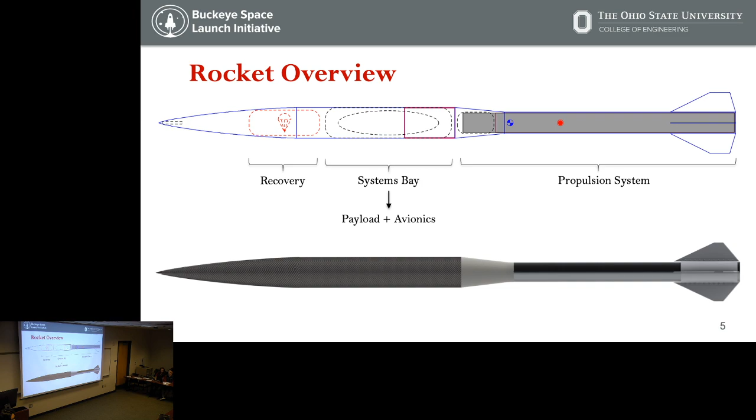You can see from the colors what the parts are made of — we'll have our own created nose cone out of carbon fiber, and a body tube out of carbon fiber. Then a special transition section, made out of fiberglass to ensure radio frequency transparency, since this is also where our telemetry will be housed. That's a very light overview; our leads will go into much greater detail about all of these.

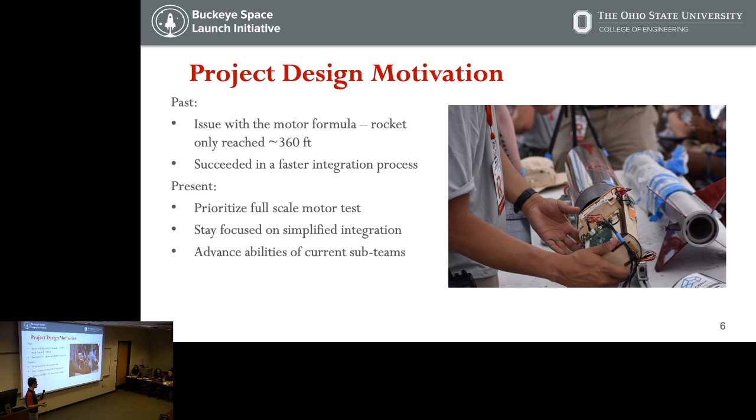Okay. Hi, I'm Carly. I'm the structures team lead.

The purpose of the structures team is to construct the airframe and all the internal components, mostly so that they survive all the stages of flight, but also to optimize the vehicle's performance in flight. We also provide hands-on opportunities for all of our members to construct composite components. And we also build the team's information base and pass on information so that future iterations of the team can use it.

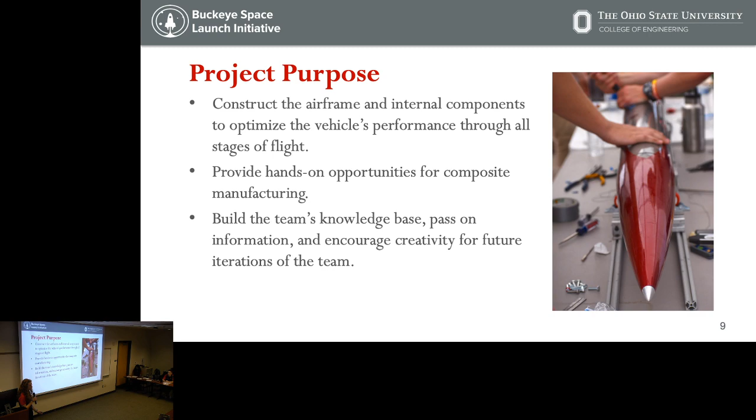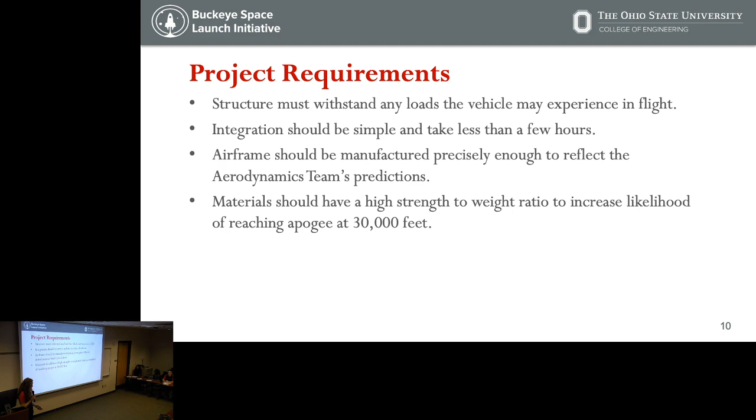The project requirements for the structures team are, firstly, to withstand any loads the vehicle may experience in flight. Integration should remain simple and straightforward and take less than a few hours. We're aiming to launch on the first day again like we did last year. The airframe should be manufactured precisely enough to reflect the aerodynamics team's work predicting how it will perform in flight. And our materials should be light enough so that our vehicle can get to 30,000 feet while still maintaining that strength. On our materials, we did some composite testing at Scott Lab according to ASTM standards.

The pieces varied in number of layers. We did 2, 4, 6, 8, or 10 layers, and they varied in epoxy type, high or low temperature. In some of our layup processes, we use a spray-on adhesive in the layup procedure. We wanted to see if that would negatively affect how the piece performs structurally.

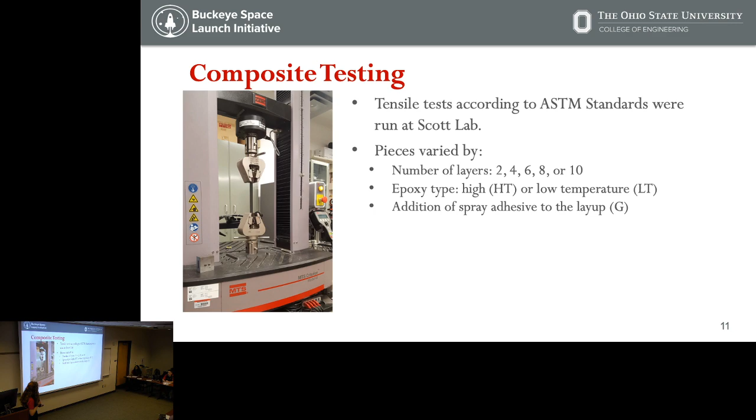The results from this are as shown. The load is on the y-axis, and the bar's height represents how much load the piece can resist before breaking. On the x-axis is the label. HT stands for high temp, LT stands for low temp. The addition of G stands for the addition of the spray glue, and the number represents how many layers the piece has. These are preliminary results, and in the chart is about 25 trials. So it basically just compares the pieces between each other.

What we found was, as you'd expect, the fracture strength increases as you go up in the number of layers in the laminate. But as we did not expect, the low temperature epoxy consistently performed better than the high temperature epoxy. Also, the spray adhesive had no negative effect on the piece's tensile properties.

Further analysis into this data would give the Young's modulus and Poisson's ratio, which could be used in an FEA software along with the aerodynamics data to figure out how each piece would perform under loads.

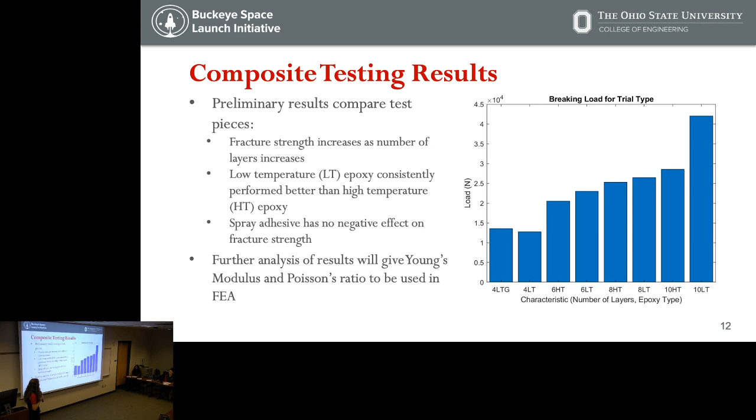So if you were here for the PDR, you saw this image with all of our pieces together. The fins in the fin can are likely going to be purchased again unless we have time to water jet cut them. The motor tube, fins, fin can, and the motor tube mount are all aluminum, and we're also going to make our own motor tube mount. The transition piece, coupler, body tube, and nose cone, like Anu said, are composite.

The coupler, body tube, and nose cone are carbon fiber, and the transition piece is fiberglass, like Anu said. We're also going to use high temperature epoxy in all of our composite pieces, just for heat resistance in case the vehicle experiences any shocks along its flight.

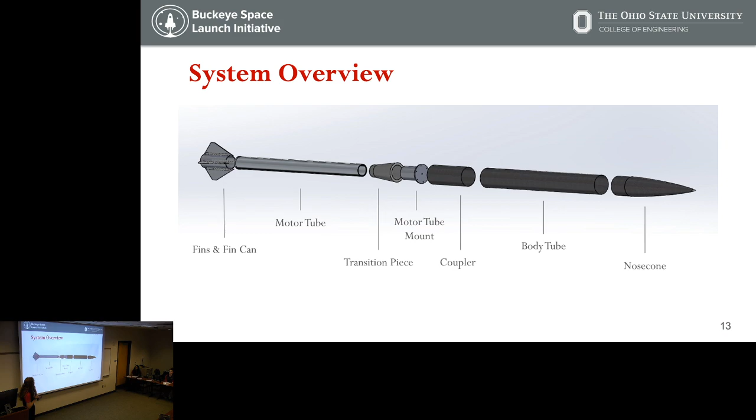I'll do a brief overview of each piece in general. The nose cone is the same as last year. It's a 27.5-inch von Kármán shape with a 6-inch coupler laid up in one piece. The carbon fiber is 6 layers thick and has an aluminum tip at the top.

This year, we're going to add spray adhesive into the manufacturing process. That's so the carbon fiber doesn't pull itself away from the mold, and when we get the piece out, it'll be the same shape as we'd expect. This worked in test trial, so that's exciting. Also, the spray glue didn't have any negative effect on the tensile properties of the piece.

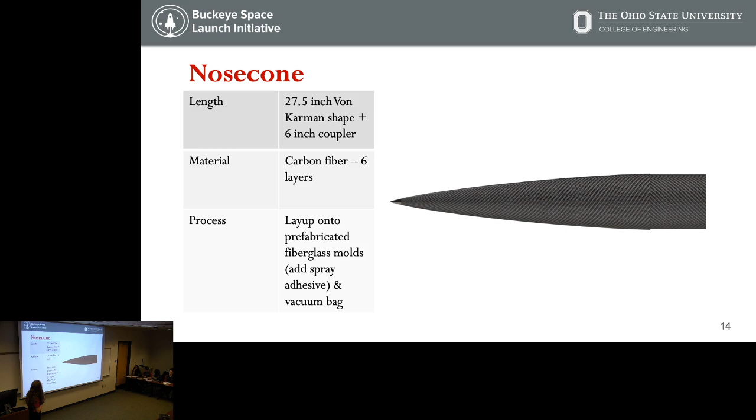The body tube would slide onto the coupler of the nose cone and meet the nose cone at the shoulder. The length is 31.5 inches. This will also be 6 layers of carbon fiber laid up on an aluminum mandrel. We'll roll on a perforated shrink tape to squeeze out any excess epoxy and reduce the weight.

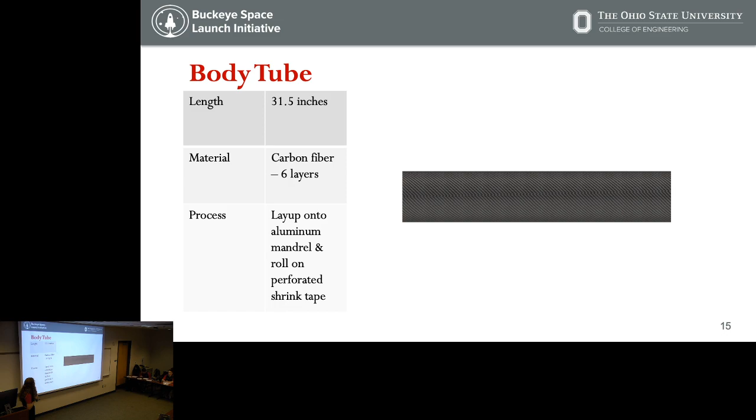For the bulkheads this year, instead of using a wood material as the core, we'll use honeycomb. These will be laid up by first making 2 carbon fiber plates, and after they cure, we'll sandwich honeycomb in between them, along with an adhesive to keep it all together.

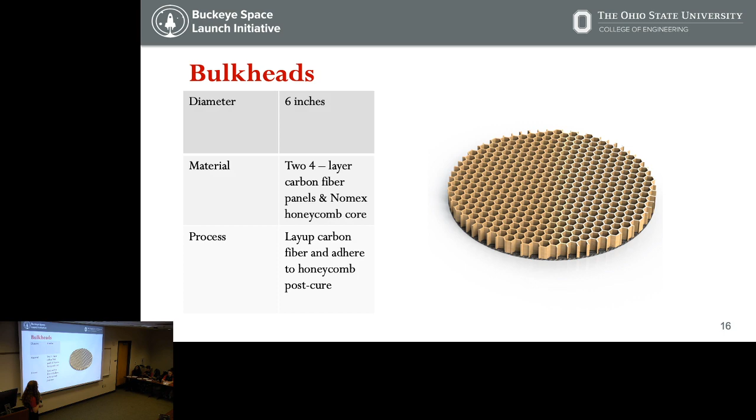This piece is our coupler. As you can see, on one end is a flat part where it's closed off, and the top is free, or hollow - there's no flat plate there. It'll be 10 inches long, and we're planning to overbuild this piece.

That's mainly because where it's placed in the rocket is critical, and it has to adhere the top of the rocket to the bottom of the rocket and experience all the loads and moments in flight. So we can't confidently say it can be 6 layers thick or 8 layers thick. To add in that factor of safety, we're making it 10 layers thick.

It'll be laid up similar to the body tube on an aluminum mandrel and vacuum bagged.

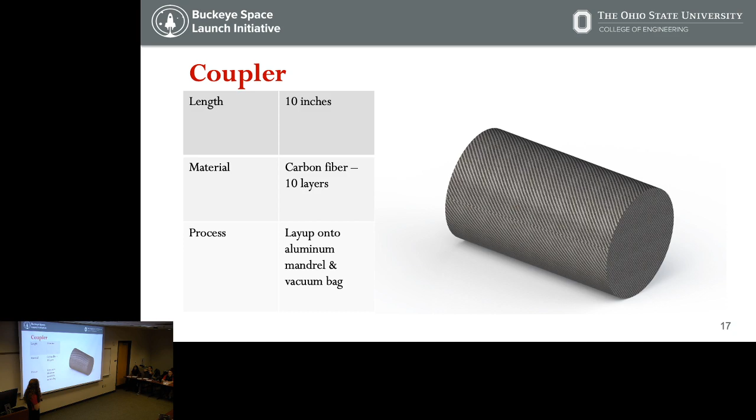The transition section will be 10 inches long. It'll start at the diameter of the body tube and taper to the diameter of the motor tube. It'll be fiberglass, like Anu said, and it'll be 7 layers thick.

This piece is different from last year. Last year, this piece was about 12 layers thick because it was load-bearing, but because this year all of the loading goes mostly through the motor tube mount, this can be much thinner than last year, and that's much lighter. So this is 7 layers thick. It'll be laid up the same as the nose cone on prefabricated molds with the spray adhesive and vacuum bagged.

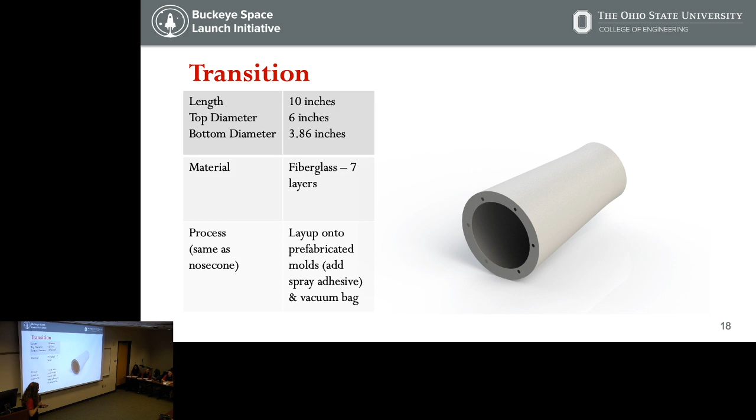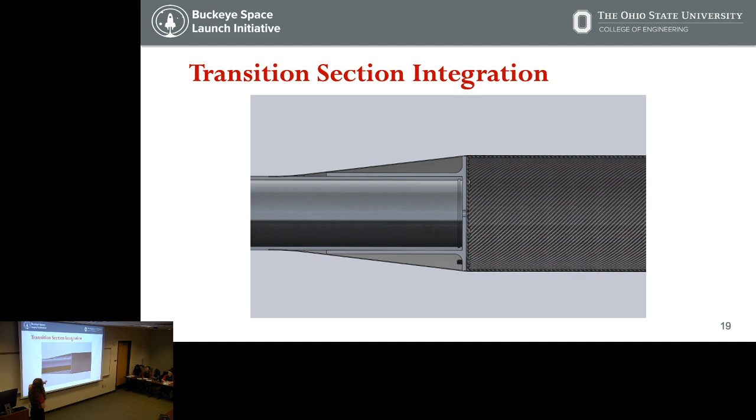Here's showing again what the integration looks like. You can see at the top is the body tube, where the coupler would slide into the body tube, and the flat face would lay on the motor tube mount. That'll bolt into it, with the transition bolting in between the motor tube mount and the coupler. Then the body tube will slide all the way over the coupler and be flush with the transition section.

So this is our risk matrix. I'm calling the composite airframe any composite pieces that are on the outer surface - that'd be the nose cone, body tube, and transition section. Any failure there would result in a catastrophic loss of the vehicle. It's lower likelihood because these are all components that have been flown before and are similar to previous designs, except for the transition section. But if that piece was to fail, it wouldn't cause any catastrophic loss.

Similarly, composite airframe failure due to heating would occur if the vehicle experienced any shocks and the temperature increase caused delaminations in the epoxy or burning. That's a lower likelihood and would cause significant critical impact, but not a catastrophic loss, because it would be a localized failure rather than a whole failure.

The coupler failure would be considered a catastrophic loss to the vehicle, and it's in the likely category because we do make this piece and it's at a critical point in the rocket. It's an SRAD component, so you would have any kind of likelihood of failure with that too.

The bulkhead and internal component failure is kind of new this year because it's honeycomb instead of wood. The motor mount failure and the fin failure, because those two are aluminum, are placed in the not likely category, but would cause a catastrophic loss of the vehicle. Improper integration would be anywhere where it's not a failure in the piece itself, but a failure due to the way it was integrated, which could happen on any piece.

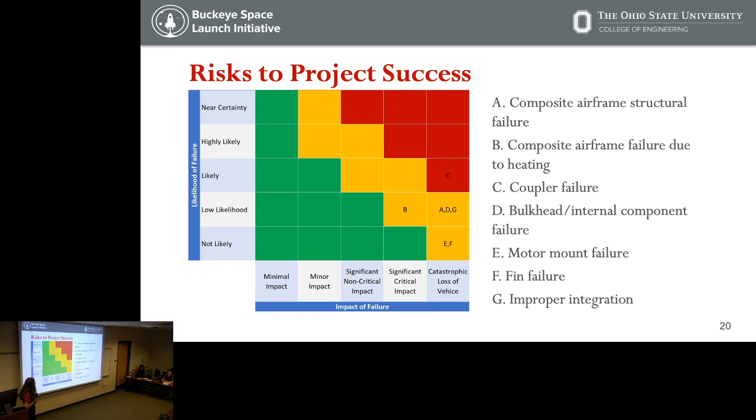We had plans to do FEA. The data from the composite testing would also go into that. I don't think we'll have those results ready by the time this piece needs to be fabricated, so we're overbuilding this part right now. But FEA in the future, for future versions of the team who want to use this part, would be really good too.

Yeah, what are the loads? They're bending and drag forces.

That sounds like a question for Ed though. He's going next too. Okay.

I forgot to mention a bit earlier, so as with our PDR, what we're going to do after each section is have 5 minutes for questions. Once those 5 minutes are over, if there are additional questions, we'll have time at the end of the presentation to ask those. So we have about 1 more minute.

Yeah, I'd say test for torque specification, you need to test for compression and bending. We were thinking it would fail due to torque, or also due to bending, before it would fail in compression though, so we would do the bending.

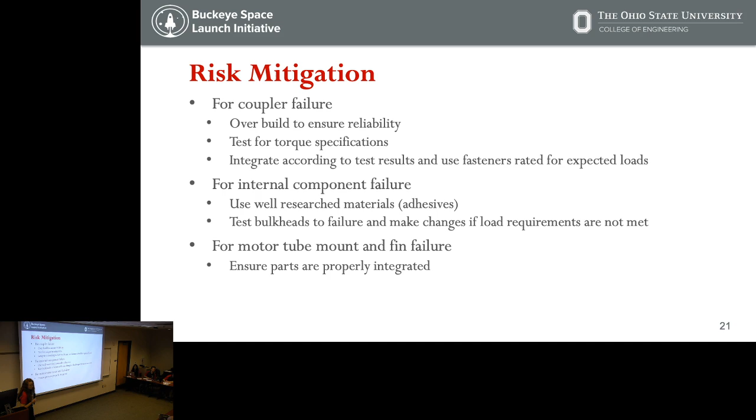Sure. Okay, I'm going to hand it off to Ed, the aerodynamics lead.

Hello everyone, my name's Ed, I'm the aerodynamics sub-team lead. What we do on the aerodynamics sub-team is try to aerodynamically characterize the rocket during flight, which means specifically determining the loads on the rocket, as well as determining stability throughout the flight. We also work to improve our members' current understanding of fluid dynamics and potential applications of fluid dynamics.

Our requirements as the aerodynamics team are to provide a drag estimate, particularly at the maximum dynamic pressure, also known as max Q, which is where the drag forces are highest. We also determine the rocket stability and any potential response to in-flight disturbances. Further than that, we look to investigate and improve certain rocket components, whether it's the nose cone or transition piece, and based on those simulation results, verification, and interpretation, we can recommend any potential improvements.

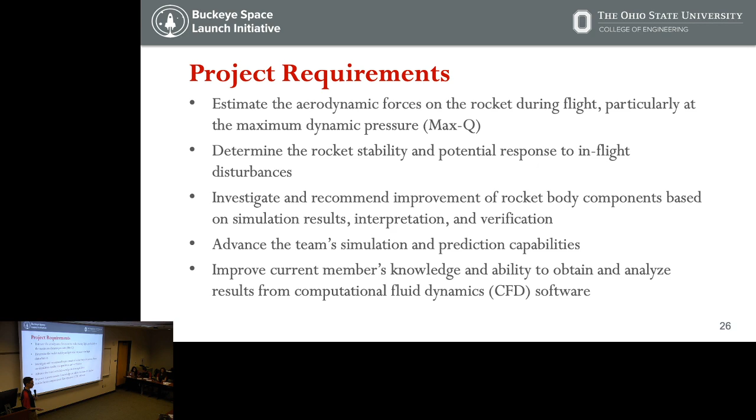We're also always looking to advance the team's simulation capabilities and prediction capabilities as far as rocket flight goes. And finally, we are always looking to improve our current members' understanding of computational fluid dynamics, or CFD, which is the software we use to determine these loads.

So our system breakdown is going to be more of an analysis breakdown, as we don't have a physical system on the rocket. But to start, this is our current prediction, which comes from OpenRocket. It is a slight over prediction, hence why our apogee is right now at 32,739 feet.

Our max Mach number is about 1.98. But our rocket is currently stable throughout all of its flight. It is stable off the rail, so that is not a concern as of right now, but of course it's something that we do always monitor.

As far as our analysis, we also expanded our 2D simulation from the PDR and updated the max Q conditions, not to the most recent simulation, because we only got that most recent OpenRocket data a few days ago, so not enough time to re-simulate everything, but to the most recent one before that, so the conditions are close.

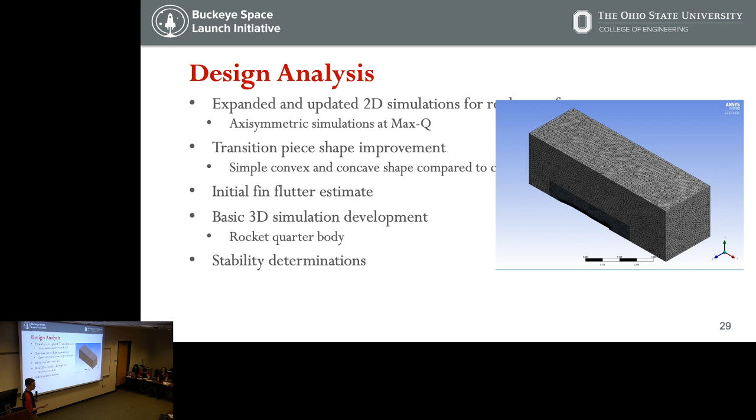We also looked at improving our current transition piece, improving its shape, as the current conical shape didn't have any documentation found from our team archives on why that shape was chosen. So we looked to improve that with a simple convex and concave shape. We also put together an initial fin flutter estimate, and then we've moved into 3D simulations for the whole rocket body to determine an accurate drag representation.

And then finally, we're always monitoring stability and trying to better our way, or further our methods, of stability determination.

So this is the updated 2D simulation, run at max Q. These pictures are a little hard to see, but there is, like we expect, a shock at the nose cone and a shock at the transition piece. These are run without fins or fin can, because the simulations are run axisymmetric, meaning it revolves the 2D domain about a chosen axis to simulate a 3D flow field. Using that solver, we can't input the fins, because it would just create essentially a block around the back of the rocket and give us inaccurate results.

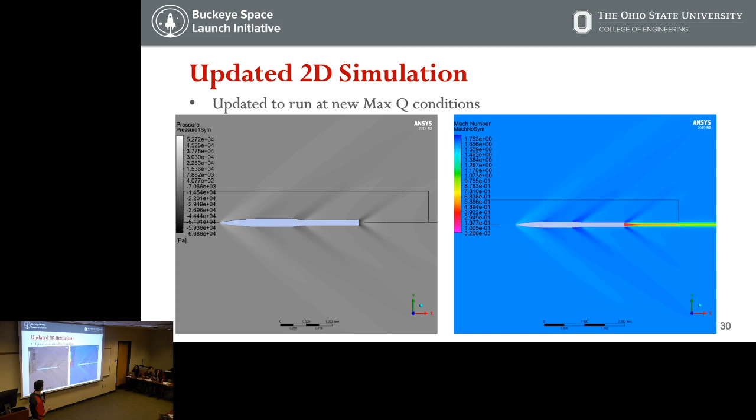But again, these results are about what we expected, and they will be updated again with the new max Q conditions from the new simulation.

So we also looked at improving our transition piece. As I said, there was no documentation on the choice for our conical shape. We began with a simple concave and convex shape, as seen on the right here. These shapes were chosen just as a proof of concept, to see whether or not we could actually improve the drag on the rocket and improve the aerodynamic performance.

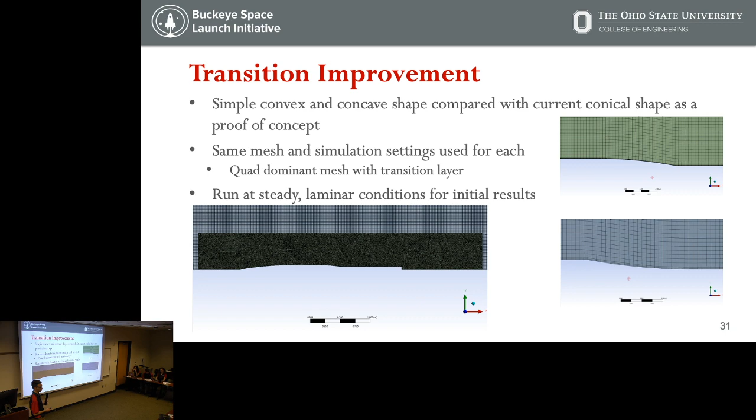We meshed at the same conditions, with a larger outer body sizing, smaller inner body, and a transition layer on the rocket surface to try to capture the boundary layer. We tested these with the same settings in the solver window, meaning steady and laminar conditions, just as an initial simulation to make sure we get results.

So this is the Mach number, and the results are about what we'd expect. With the convex piece, the shock is more at the trailing edge, which is more of a sharp corner, and with the concave piece, the shock is at the leading edge, which again is the sharper corner there.

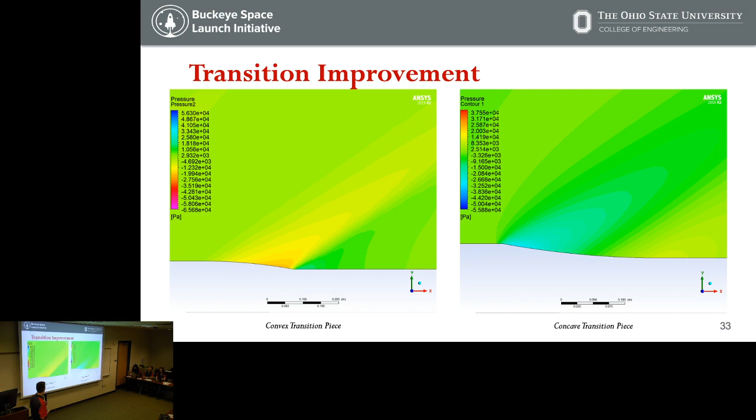Looking at the pressure results also, these are a little more interesting. This is where the drag would be more affected, this is where we'd see the effect on drag, in the pressure results. Again you can notice the shocks at the trailing edge on the convex piece and the leading edge on the concave piece.

We also took drag numbers from the simulations, just as a point of comparison. While these numbers might not be fully accurate, they do provide a good point of comparison when all the simulations are run at the same settings. With the concave shape, they're much higher than the convex shape, so it does bear more investigation into whether we can improve upon that convex shape and go further from there.

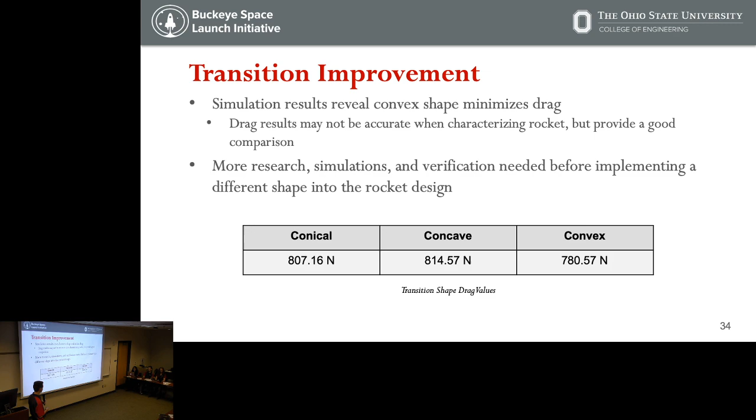We're not currently recommending a change in design, simply because we didn't have enough time to fully simulate and validate our results, but it's nice to see this initial comparison. It's a point that we're going to build upon in the future, and potentially into next year.

Moving into the 3D simulation, a quarter rocket body was used because the rocket can be assumed to be about symmetrical about both axes, which allows us to cut down on computing power needed. We started with a smaller mesh, about 3 million elements.

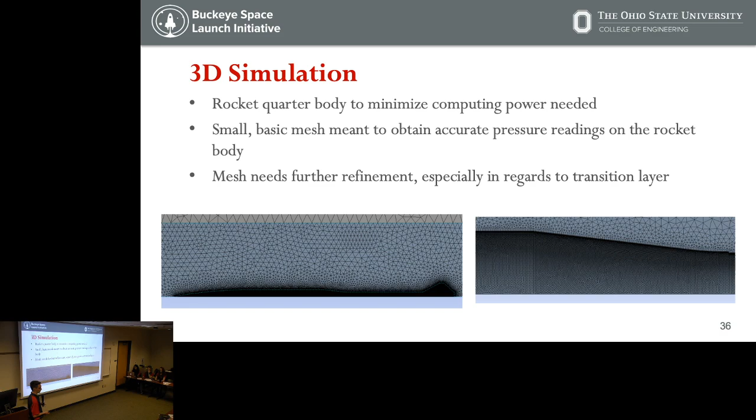There were issues with the transition layer, with stair stepping as it's called, where it removes elements where there might be errors around a corner or sharp edges. So this is currently a work in progress.

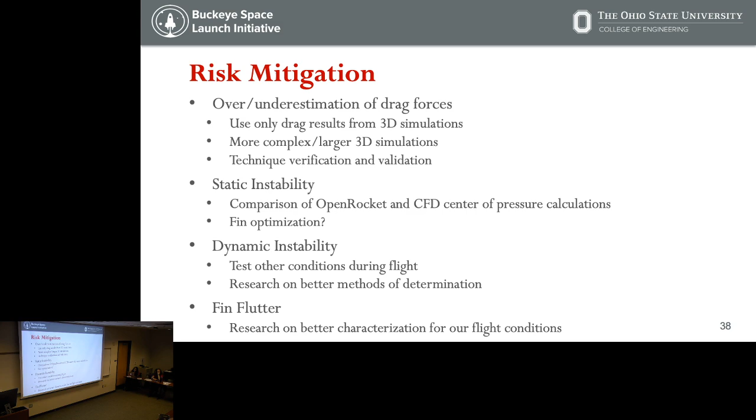First off, you said that underestimation of drag forces, and you said you have both underestimation and overestimation of drag forces are likely. Is that just because you don't really know, or do you have any reason? That's because it's difficult.

Subsonic, it's easy to extrapolate the coefficients of drag from the data, even at low resolutions. This gives you a baseline that shows drag. It's not that hard, plugging in the numbers you got, and figuring out the plane data, to at least get you somewhere in the ballpark to make sure your predictions are accurate. I mean, that's wasted data if you're not using it. Yeah, absolutely, that's definitely something we're looking to do.

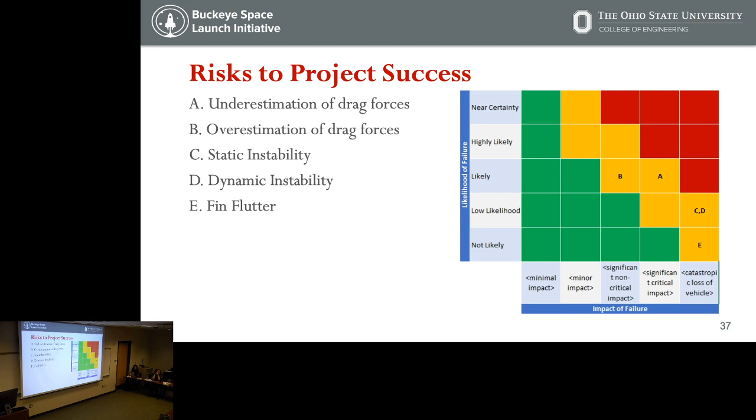Did you predict a coefficient of drag? No, not yet, because we haven't actually produced drag numbers yet.

Hello everyone, I'm Gordon. I'm the subsystem lead for the avionics team, which is basically the electronics.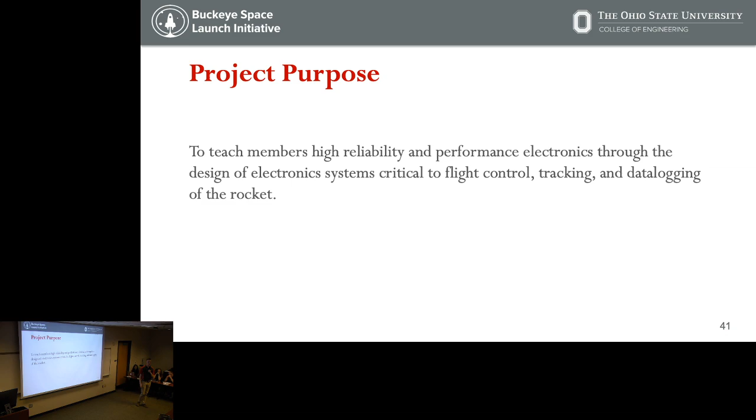The purpose of our project is to teach members high reliability and performance electronics through the design of electronic systems that are critical to flight control, tracking, and data logging of the rocket.

Some of the requirements our team is tasked with: primarily deploying the drogue parachute and the main parachute, both critical to having a good flight. Next is maintaining a telemetry link throughout the flight, which is also critical because we need to find the rocket afterwards, and that gives us GPS coordinates for where to look.

One of our goals is to have a quick integration time, less than 20 minutes, because we've had issues with integration in the past. That's not super critical, but would be a big advantage over what we've had to do in the past.

Remote arming of all electronics is critical given what we have and the technology we built and the way the structure is built. Recording flight video is something we really like to have, but it's not critical to the complete success of the flight.

We're going to go through a system breakdown of the avionics system, which kind of excludes the telemetry system, but we'll cover that a little later.

Here's our system flow chart. We'll basically go around and break down each section throughout the presentation. The first thing we're going to look at is the communication system.

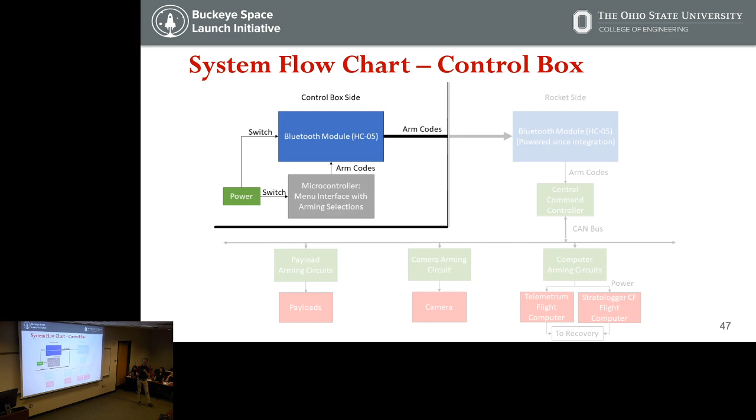Next we're going to look at the control box side - the control box on the rocket side. The control box is contained separate from the rocket, obviously, and that's where all the arming electronics are.

The control box, like I said earlier, contains circuitry that communicates with all the rocket electronics. It'll be 3D printed for a high degree of customization so we can get exactly what we need. It'll have an LCD screen with a menu, which is something new this year, a power switch, and two buttons for menu control.

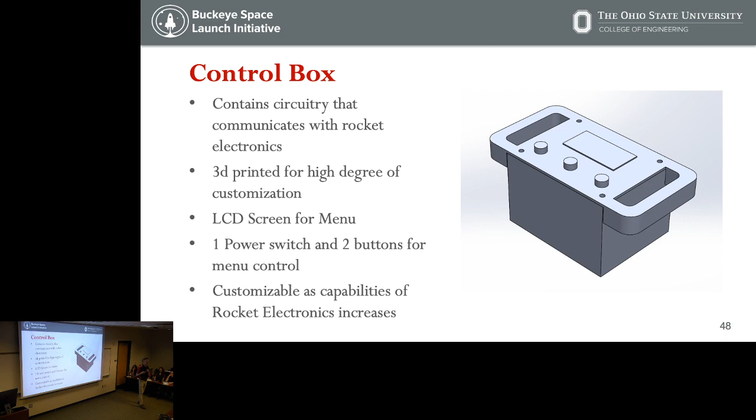One of the big advantages of using the screen and buttons instead of just switches like in the past is that it'll be customizable - you can update the menu relatively easily just by reprogramming it rather than having to add more switches or mess with the circuitry. You just add more options. It also allows for positive feedback, so we know when different things have been armed and can get confirmation that they've actually received the signal.

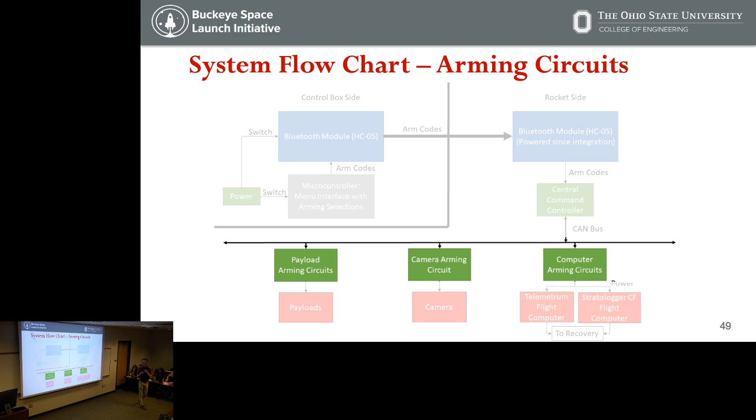Next we're going to talk about the arming circuits. They're kind of one of the main workhorses in the middle there, powering the payloads, the camera arming, and the computers as well. So we'll dive into how those work.

So basically they are going to be receiving signal arm or disarm codes from the central command controller over the CAN bus. They'll take those, and for each individual circuit, there'll be an individual circuit for each component being armed. The circuitry will be designed to default on if there's a power failure. So for example, if somehow the arming circuit fails, there's circuitry built in that will automatically turn it on, which would be a case we'd likely want, because if there was a failure in flight, we would want the flight computers to come back on to have any kind of successful flight.

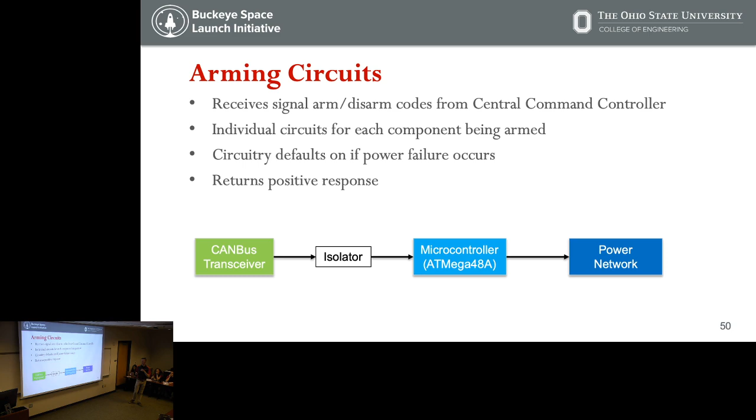And then also now we'll be able to return a positive response. So you can kind of see we'll have a CAN bus transceiver. There'll be an isolator in between that will isolate that from the rest of the rocket for safety. And then we'll have a microcontroller, a very simple microcontroller, that basically all it does is look for that code, and then we'll be able to turn on the power for its selected component.

So next we'll be talking about the flight computers. This year we'll be using 2 commercial flight computers. A flight computer, basically, is a microcontroller that detects apogee, the top of the rocket's flight path, and then has the ability to deploy the drogue chute at that point. Then at about 1,500 feet above the ground, it'll deploy the main chute. So this year we'll be flying 2 commercial flight computers as independent redundant systems.

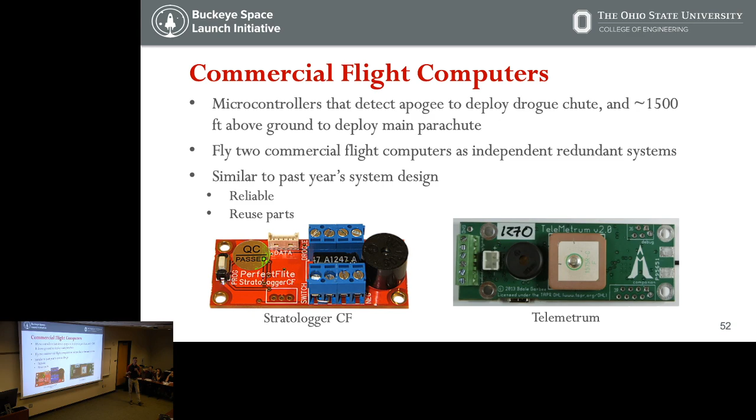What that means is that both of them have separate batteries, separate arming, completely electrically isolated from each other, and both of them can individually carry out the entire mission that the rocket needs. Usually we'll put one in a primary and a secondary role. The primary one will go off first, and then if for some reason the primary one fails, the secondary one will go off a second or 2 later. That protects some of the rocket components from the explosives, because if you had 2 go off at the same time, it could cause damage. So we have a primary and secondary.

It'll be similar to past year's design, so it's reliable. They're commercial flight computers, used a ton, and we'll also be able to reuse some of the parts from last year, which will help on our budget, so that's good.

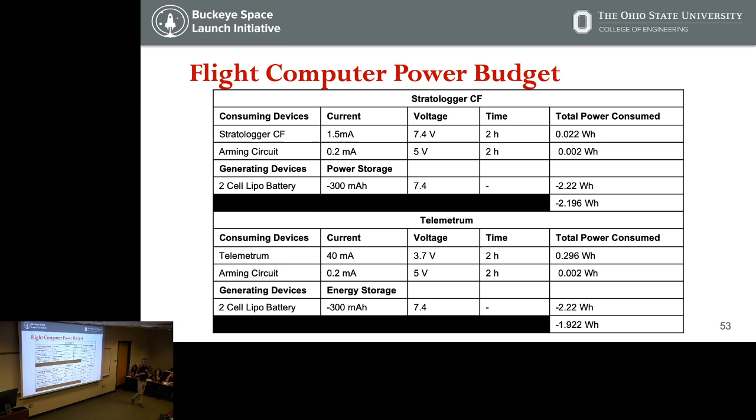So just the power budget for the flight computers. We have the stratologger and the telemetrum. With their current draws and their voltages, for a time of 2 hours, which is definitely more than we expect, we should be more than covered with 2-cell LiPo batteries at 300 milliamp hours.

Now we're going to talk about the cameras, right down there. The cameras will be using an action camera to collect flight video. It'll just be simpler, set up to record automatically on power up. So when they're turned on from the arming circuit through the CAN bus, they'll come on and just start recording immediately. That'll be nice because in years past we've had to integrate them and turn them on at integration, which from the time we integrate to the time we launch can be up to an hour or even more sometimes. This will hopefully take less than 15 or 20 minutes before we launch.

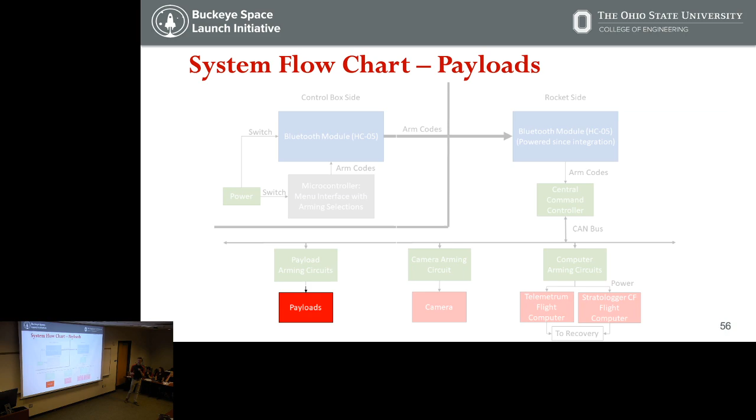Now we're going to talk a little bit about the payload arming. That's a new feature we're adding this year, or maybe adding depending on the payloads and if they want to use it. This new communication system allows for easy addition of other electronics modules, so this enables our optional arming for our payloads. We'll only control the power to the payloads.

Basically, the way it would work is that the user would only need to connect their batteries to the circuit, and then connect the power out to their payload. So it'd be very easy for them to interface with, and then we would be able to manage all of the arming with it. That would extend their battery life as well, or they could use smaller batteries, which would build in more security into the system for things you can't control, like timing delays from integration to actual launch.

So we're working on developing a custom flight computer, too, which will be pressure and acceleration based sensing, just to get started. And again, it needs to have the ability to deploy parachutes, and obviously it needs to be able to tell the altitude and sense the events going on around it. And then also it needs to be robust and reliable.

Really, the reason we're doing this is to enable a higher level of customization on the avionics team and advance our technical experience. Two, as we get more custom devices, we can optimize things, like putting more parts together on single boards, which saves a lot on space, connections, and robustness. This year we'll fly in a non-critical role for the competition rocket, so it'll be armed in a similar way to the payloads.

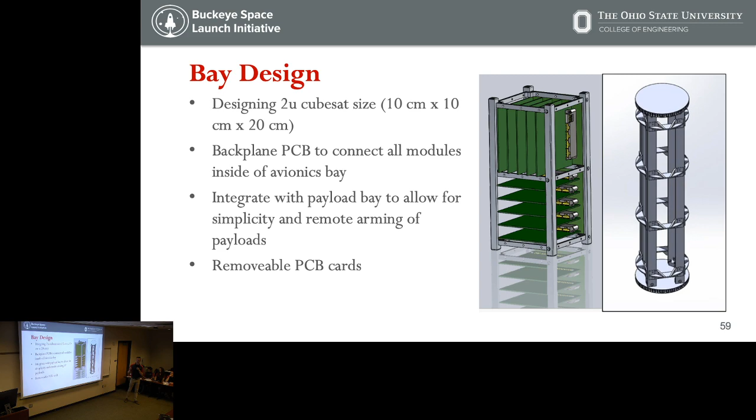We'll be able to integrate with the payload bay to allow for simplicity and remote arming of the payloads. You'll see this structure again - these are the system rails that'll be holding the payloads and the avionics bay together, so the inside parts will be able to slide together, which will be really useful for integration. They'll have removable PCB cards so we can take them in and out, and there'll be a securing mechanism to hold them in once we're ready to fly.

For telemetry - these are the electronics that track the rocket throughout the flight - this year we'll be using a commercial tele-GPS system built by Altus Metrum, which makes a lot of different rocket electronics components. It's about 440 megahertz, in the ham radio bands. What we're using is reliable and easy to integrate, and we're familiar with it - we've used it a good amount. For the ease and all the other goals we have this year, we felt this was one area we could just go with commercial and make it easier.

The telemetry and the battery will be integrated completely into the fiberglass section, because the fiberglass section is RF transparent, whereas the carbon fiber is RF opaque, so you can't transmit very well through the carbon fiber. So it needs to be in that fiberglass section, or at least the antennas do. One big advantage is that in years past we've had issues getting wires between the transition section and the body to the telemetry bay. This year all of that will be contained inside the fiberglass section, so we won't have to worry about that, which will be a huge integration advantage.

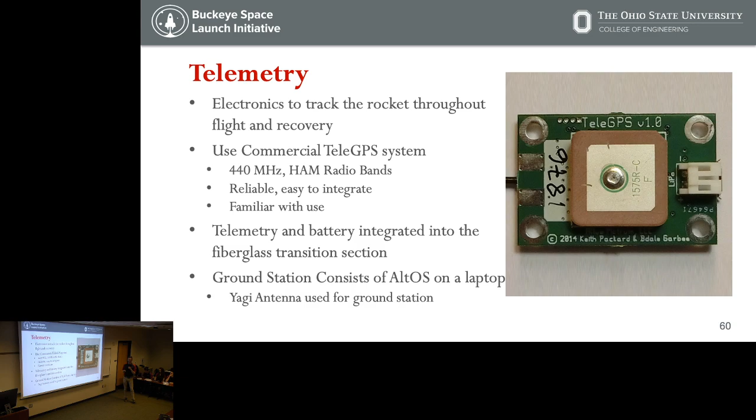Then the ground station will consist of AltOS, which is the software that goes with this on a laptop, and we have our Yagi antenna for our ground station.

So some of the risks to our project success: the first two are kind of related, but we have a single flight computer failure or single flight computer battery failure. Both of those are, well especially the single flight computer failure, pretty unlikely because they're commercial products and pretty reliable. I had that as not likely, but I also had both of those as minor impact, since we are flying a completely redundant system, the other one should be able to take over and complete the task. With the battery, a little bit higher likelihood, just because the battery is more prone to fail, and also they could die in terms of not having enough power if they're on for too long.

We also had a dual computer failure risk. Obviously that's not very likely, again for the reasons I had before, since they're commercial systems and pretty reliable, but obviously that would result in a catastrophic loss of vehicle, as we would know from the 2018 launch year.

And then D, we had a bay structural failure. We're feeling decently confident with it because the system we're using has been used for the payloads for the past little bit, as far as the Bay. But again, that would likely end up in catastrophic loss of vehicle if the electronics were crushed, because there wouldn't be anything to control the flight.

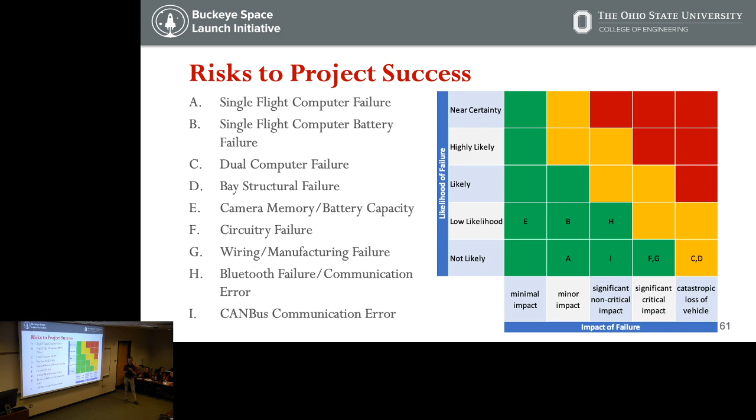And then the last one I had was a CAN bus communication error, which again is not super likely, just because the CAN bus is a very robust and reliable communication system.

So some of our mitigations. With the single flight computer failures, really the biggest one is just having the redundant isolated computers, which adds in the extra layer of security. We'll also be able to remote arm close to launch, which should save the batteries a decent amount.

A dual computer failure, again, just the redundant isolated computers, and beyond that, that's just a risk you have to take. A bay structural failure, we're looking to perform structural analysis for the predicted forces, so just testing that it can actually maintain the amount, maybe with some blank PCB cards to make sure that nothing's getting rattled around, or it's not affecting the way the circuit connections would be if there is force on there.

Camera memory and battery capacity, again the remote arming should solve a lot of those problems, being able to arm it about half an hour or less before we actually launch, hopefully. But obviously camera memory and camera battery will have enough for about 2 hours of footage.

So circuitry failure and wiring and manufacturing failure. Some mitigation is just using our PCBs whenever possible, so that reduces some of those less secure wire connections and terminal connections between parts, and then circuitry testing as we go along.

And then the Bluetooth failure communication error and the CAN bus communication error can kind of be mitigated through systems testing, and then again running as much of our logic and connections through PCBs that are a lot more reliable as far as connection, rather than wires and terminals.

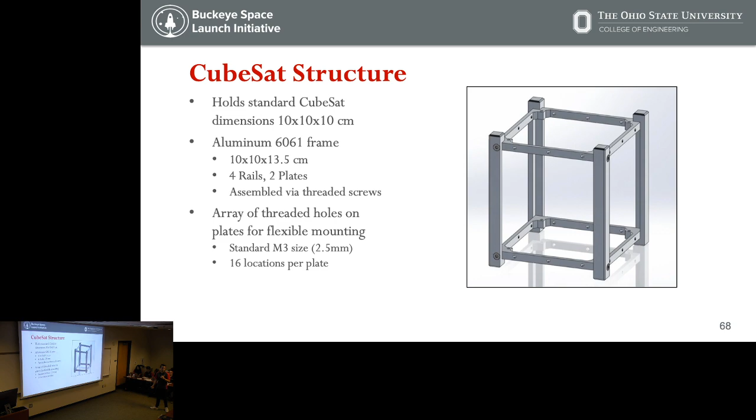So pretty simple. This can also be extended - you're looking at a 1U right now, but for example our payload is likely going to be 2 to 3U, so all we have to do is extend these rails to meet those requirements. Additionally, across the plates on the top and the bottom, we have spaces for threaded holes. This just gives us flexibility when designing our payload, to play around with different layouts and what's the most space efficient.

Okay, so moving on to the payload bay. You could say, Joe, that's great, the Cubesat structure looks awesome, but you're just going to slap that into the body tube and let it rattle around? Not really. That's why we have this payload bay. This is what's going to help keep the experiment snug inside the rocket so it doesn't move around during flight.

Similarly with the last one, we're working on a previously flight-proven design. We've flown this kind of design before, and we're just doing little updates here and there to help out with this year's project. So this design allows for simple integration.

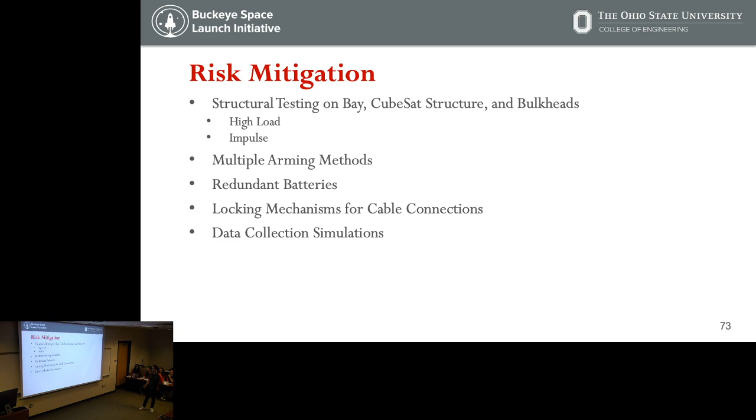You showed your subsystem with no connection to anybody else, but the avionics had a wire going to the payload. So it seems like you need an on-off wire from the avionics system. Yeah, no, I apologize.

And that's another interface that doesn't seem to be managed. Yeah, more of...

Structural weight from recovery electronics, anything else? As far as I know, the recovery is connected to the recovery bulkhead, which is screwed to the side of the body tube. So all the forces should be going through the body tube. So that's not carrying any of the internal structure on the side of it.

Okay, yes, in the back. Where do you think you should put your strain gauges?

Like I said before, this is kind of more an experimental thing I'm throwing into this, because I'm interested in how the vibrations might affect the materials we mainly use for our structures, which are carbon fiber and fiberglass. So right now, I'm thinking of making test pieces, like thin rectangular plates out of those materials, and orienting them both vertically and horizontally inside the bay. And that's what we'll apply the strain gauges to.

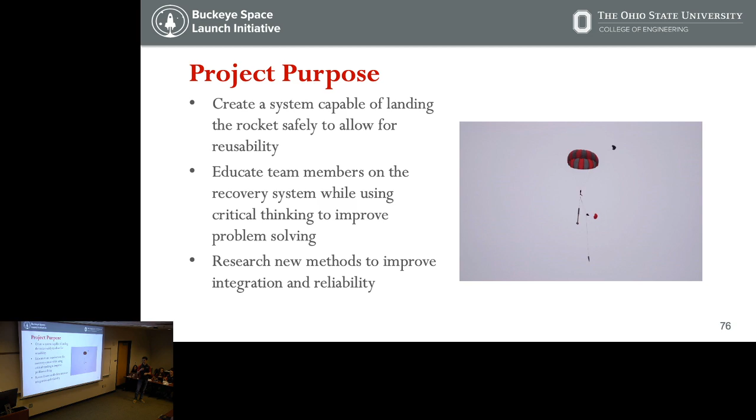So the purpose of the recovery system is to create a system capable of landing the rocket and recovering it safely so it's reusable. We also want to educate our team members on the recovery system while using critical thinking to solve problems. We also aim to research new methods and improve integration and reliability across the rocket and our system.

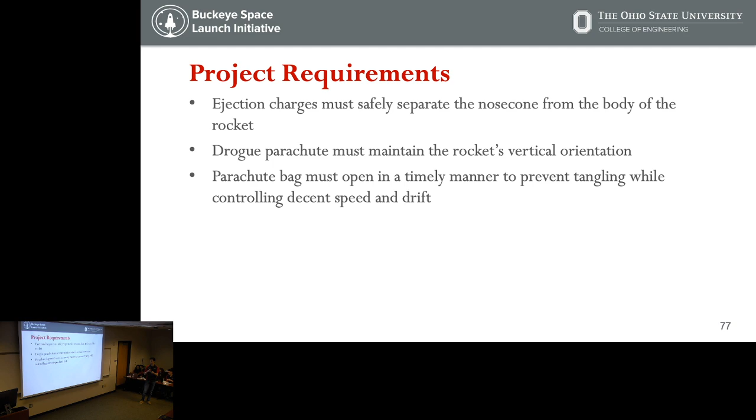There are three main requirements to the recovery system. First, the ejection charges have to successfully separate the nose cone from the body of the rocket. Second, the drogue parachute must maintain the rocket's vertical orientation with the motor down towards the ground. Third, the parachute bag must open in a timely manner to prevent tangling while controlling the drift speed and descent of the rocket.

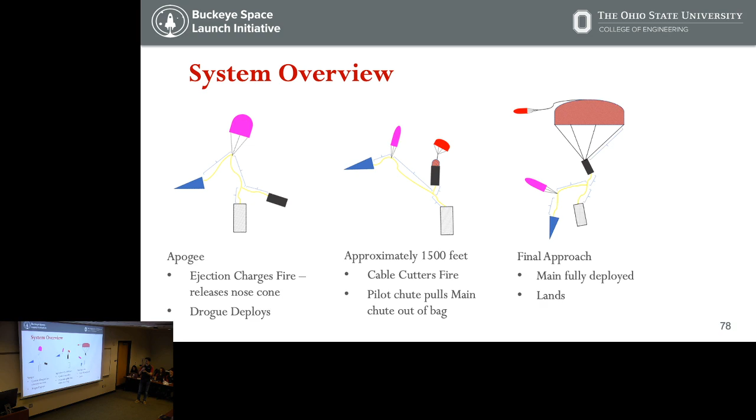A quick system overview: at apogee, the ejection charges fire, releasing the nose cone from the body of the rocket, and this deploys the drogue parachute. At approximately 1,500 feet, the cable cutters fire, releasing the pilot parachute and the main from the parachute bag, and the pilot parachute pulls the main out of the bag. On final approach, the main parachute is fully deployed, and hopefully the rocket lands safely.

Our parachute gores are designed in a MATLAB code, and the MATLAB code is based on several variables, such as apogee of the rocket, the dry weight, and the desired descent rate. It's also based on environmental factors, such as the altitude, the average air temperature, and average air density at the launch site.

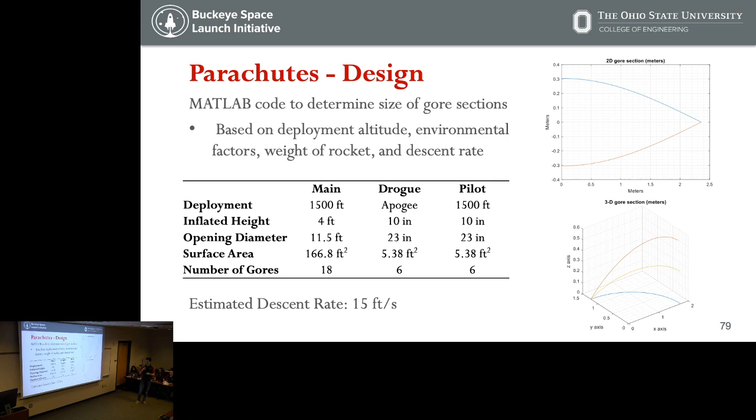Our main parachute is a semi-ellipsoidal design, and this year it's about 11.5 feet in diameter and 4 feet tall. It's comprised of 18 gores. Our drogue and pilot parachutes are much smaller, at approximately 2 feet in diameter. The parachutes are made up of 1.1 ounce ripstop nylon, and they use Spectraline for the shroud lines, which connect the parachute to the rest of the rocket.

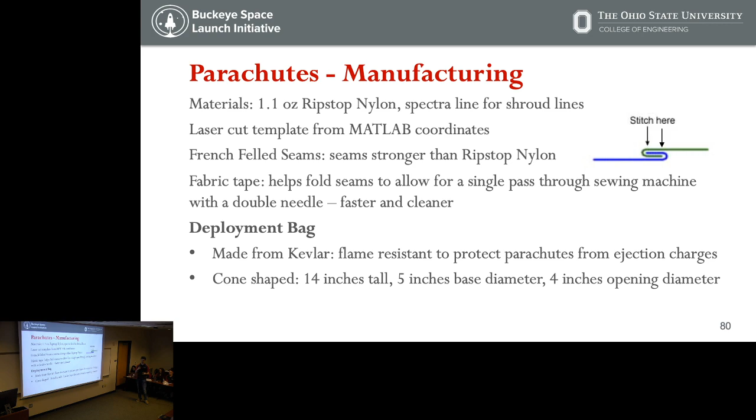The parachute bag is made of Kevlar, and it's flame retardant to protect the parachutes from the ejection charges. It's about 14 inches tall, cone shaped, with a 5 inch base diameter and about 4 inch diameter on the top.

The line configuration of the shock cord is comprised of tubular shock cord of Kevlar, calling for about 46 feet of line. This year we've reduced the length connecting the nose cone to the main line. This should keep the nose cone away from the other parachutes, such as the drogue and main, while the rocket's under drogue. When the main deploys, it's still long enough to hang about 6 feet underneath the rocket. This prevents tangling and prevents the nose cone from bumping into the rocket on descent. Our ejection charges are modeled in SolidWorks, and we have 2 canisters, one primary, one backup.

The ejection charges are screwed to the bulkhead, and they only have to be removed for storage or to replace them if damaged. We place 5 grams of black powder inside each canister, and inside the black powder is a nichrome igniter or an E-match, and these are completely sealed to work at higher altitudes.

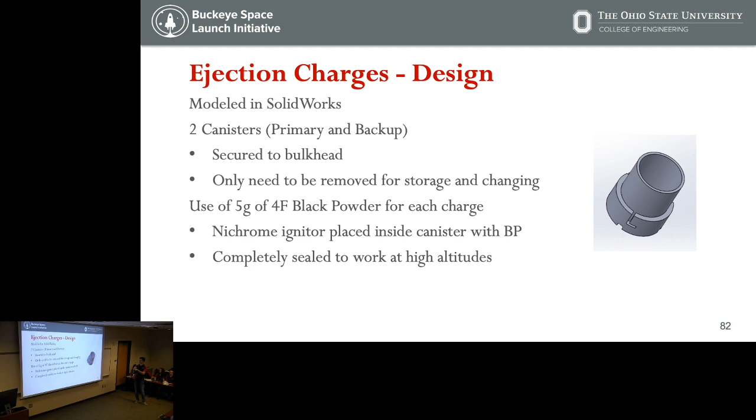The ejection charges are 3D printed with nylon, which is temperature resistant to withstand the heat of sitting on the launch pad in New Mexico. The wires from the canister go through holes, similar to what's shown here. These wires connect in one of two ports, and the other port is the wire that comes up from avionics. These lever connectors basically create a mechanical and electrical connection.

A quick overview of integration for the recovery system. The night before launch, we pack the parachutes into the bag. We lay out the shock cords and the D-link connectors. We attach the charges to the bulkhead, and we can even prepare the black powder charges for quick integration. During integration, we screw the bulkhead into the body tube of the rocket, load the black powder, seal off the canisters, and connect the wires to the flight computer.

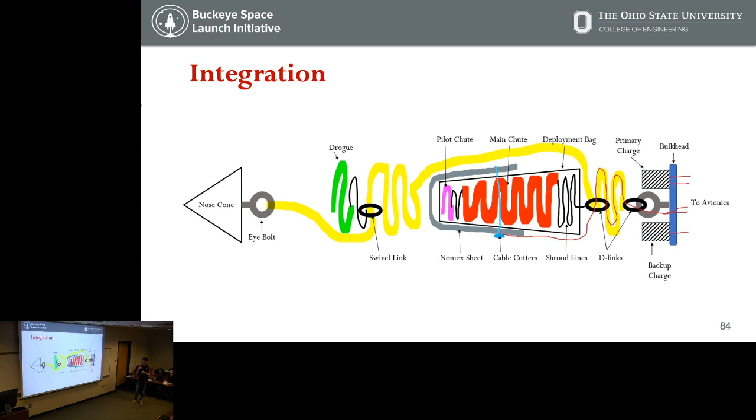Then we put a Nomex sheet down, S-fold some of the shock cord on top of that sheet, put in the parachute bag, then put in the rest of the shock cord and the drogue parachute, and slide the nose cone on. The nose cone is secured to the body with shear pins, and then the system is flight ready.

There's 2 main sources of failure for the recovery system. One is ejection charge failure, in which case the nose cone does not separate from the rocket, causing the rocket to come in ballistic. The other main source of failure is main chute deployment failure, which can cause the rocket to come in only under drogue, or under partial main parachute.

To mitigate these losses: to mitigate the risk of ejection charge failure, we test the continuity of the ejection charges during integration. To mitigate the risk of lack of force with the ejection charges, we have a redundant charge with a bit more black powder. We also conduct ground tests to make sure they're strong enough to push the nose cone off when it's held on with shear pins.

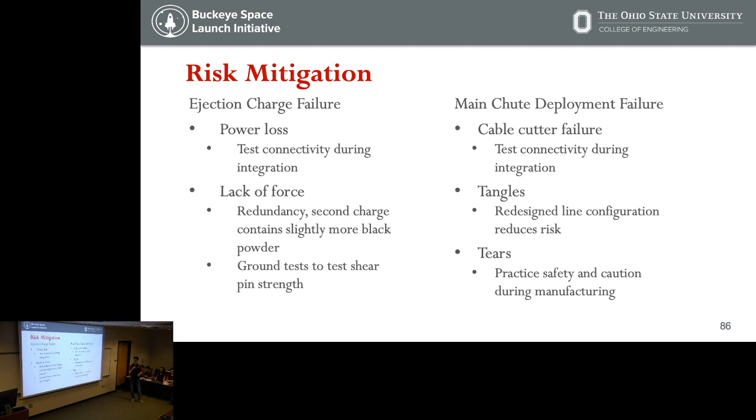To mitigate the risk of fires from the ejection charges, we use fire retardant materials such as Nomex and Kevlar to protect the parachutes from the ejection charges when they go off. Are there any questions?

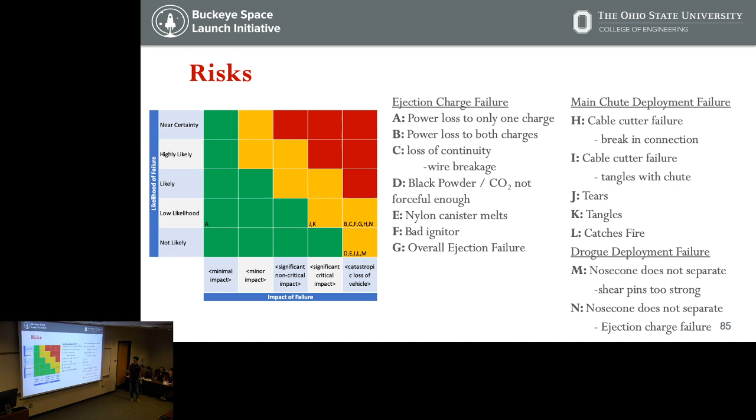I do want to see the charge holders in particular, that the design makes sense. Everything else is basically the same. The only thing—are you setting up any swivels in there? I did not mark the D-links for swivels; I simply marked the knots because this was more about the length of line of fire. But we usually put a swivel right above the main bag because the electrical wires have to go up to the cable cutters, and after that it's like—so this usually has a swivel so they don't wrap back and tangle. Everything else is just D-links, tightening the knots, holding it together.

I would like to see these pictures. Yes, in the next slide it shows better. I'll let you—we can go through that separately.

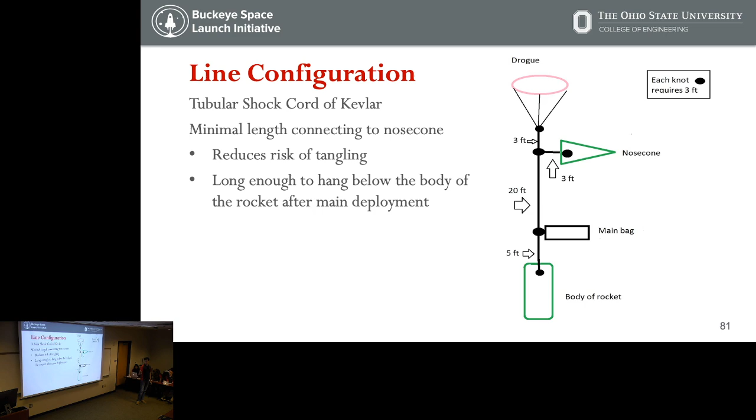I'm more concerned about the charges. I want to see what you're doing with that sooner rather than later, just because that's something that's going to be mission critical. I know you can assemble a parachute together pretty quickly—let's make sure the charge system is solid for that.

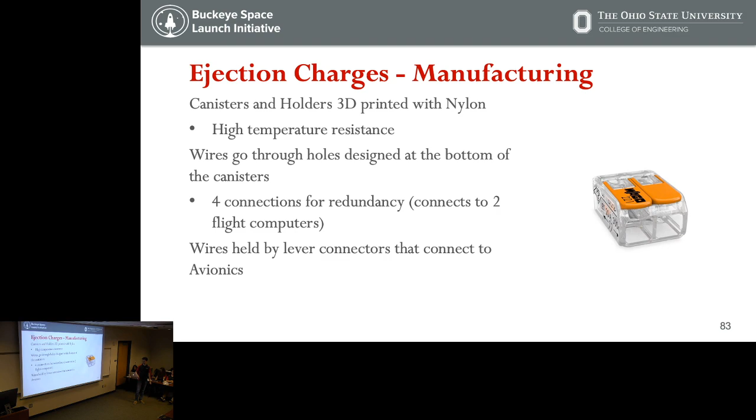My main thought for using these is, if we just used the plastic clips like 30K used last year, you still have to solder that to the E-match unless you use the whole spring system, which we're trying to avoid. So this prevents us from doing dangerous things.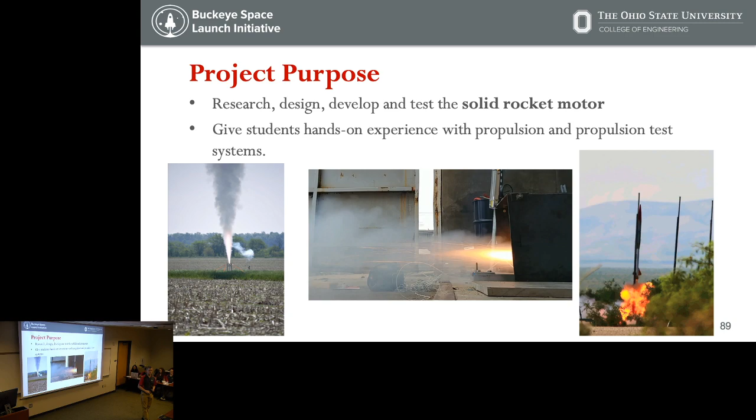So it doesn't go through the avionics system? No, this is a separate rocket launch system, sorry, I did not specify that. The ground control system, either ours or ESRA's out at the site, that will be interfaced and connected to that igniter. The igniter wires come out of the bottom of the motor. They don't go anywhere near the avionics.

Good question, thank you. Tell me about how you selected the grain chemistry and the grain configuration. Okay, so you're asking about why we chose 8 grains and the specific core diameters that we did?

Well, the burn shape is a function of time of the burning part of the solid. Okay. And what's the composition of the chemicals in the grain? Yeah, okay, I got you.

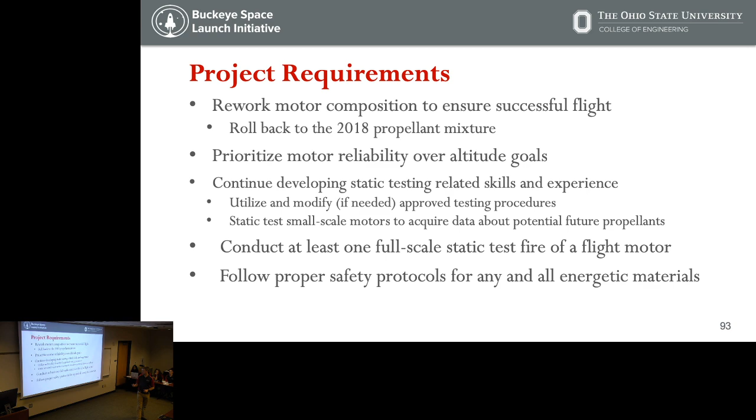Okay, so the motor propellant we use has been historically developed by Gary, and he's put a lot of work into fine-tuning it, using that motor mixture dozens and dozens of times over the course of years to fine-tune it. With the specific grains, we use what's called BATES grains. They're coated in a special inhibitor that makes it so the motor burn isn't too progressive or regressive. So it actually gives us a pretty flat line, which means we don't have too high of a force on the rocket. That's what really helps us control that burn and make sure we're not going too slow off the rail, or too quick and shredding anything. But specifically, the 8 grains and the core diameter are more so based on historic practices of what's seen, that's for the simulation to show things work.

It's just an air core, cylindrical core. Well, exactly, so the area is going to increase the burn, so the thrust should get higher with time. But the way the grains are coated, they'll actually burn from the core, but they'll also burn from the ends - correct me if I'm wrong - and because they're getting shorter, yes, the area on the inside of the core is increasing, but they're getting shorter, so the length of each individual grain is getting shorter. So the area is actually remaining relatively constant, not perfectly constant. There is some curve to it, but it's not like a wild spike like traditional core burners are. But it is not perfectly linear either, like an end burner or anything like that. Does that answer your question? Yeah, okay.

But working on there, there was some talk of the nozzle itself.

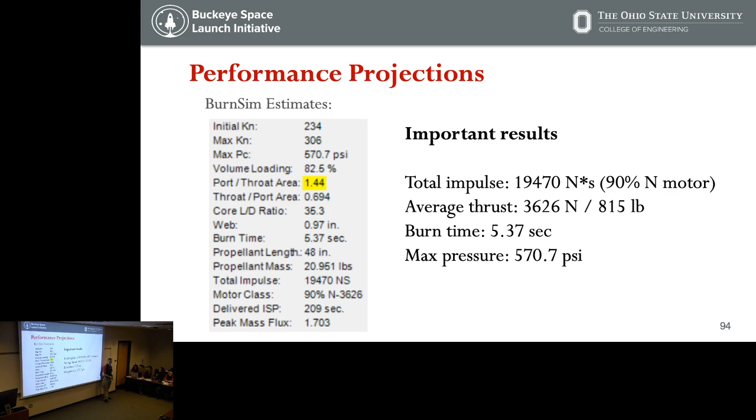Also, for the 30K SRAD category, the fact that we try to fly a payload in a Cubesat form is already really difficult. A lot of teams shy away from that because then they can make their body tube smaller and it's much easier to get to 30,000 feet. Instead, we've been focusing on the opposite, trying to get an actual Cubesat structure, which requires us to have a 6-inch ID, internal diameter, body tube minimum. Because of that, it's so much more difficult to get 30,000 feet, and the judges do recognize that.

So in that sense, they view that as a higher value compared to a team with a smaller setup. You get a higher degree of difficulty. Yeah, exactly. So even if we don't reach 30,000, if we're able to even get close with that 6-inch body tube, that's already pretty impressive, you know, with the type of motor we're using as well.

So another question, since you had a failure in your previous motor, what have you done to make sure that's not going to happen again? What are you going to do? So, in relation to what we've done differently from last year to this year to make sure we don't have a failure, there's two primary things we've done.

First, we're going to change the propellant mixture back to the 2018 version. In 2019, there were some changes made to the mixture, primarily, as far as I know, from magnesium to aluminum, and the size of the ammonium particles was reduced. We don't fully understand why it happened, but because of those changes, we're going back to the 2018 mixture. I don't know how much you know about our 2018 rocket, but that is the rocket that went up to apogee, it just came back down very fast. So the motor did work for that, so we're going back to something we know works.

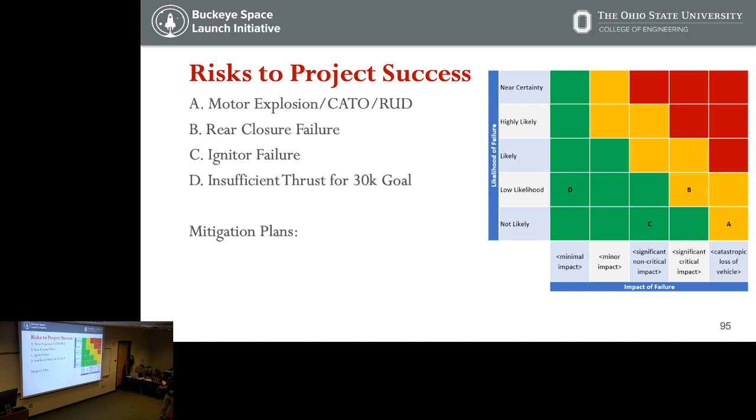So you have mechanical failures, it sounds like you're pinning it on too much energy coming out. Basically, we had too high of a pressure spike to begin with.

Can you go back to the slide with the rocket and propellant sections? You said there was an 815-pound average thrust. Does that thrust go up as it approaches that failure snap ring? What does the thrust profile look like along the length of the propellant? Because that snap ring looks like it might be bearing a lot of the thrust.

And if the average is 815, I want to know what the peak is, because a 5-second burn is essentially a steady state load, right? They usually consider about 3 seconds a steady state load, 5 seconds is more than that. So if you had a failure out the top, you've got a single point failure in that snap ring, and those snap rings are subject to assembly, and subject to the corners and how things are machined into that aluminum tube. So I would look highly suspect at that snap ring and how it performs, and if you could add another one, that would be good.

Okay, or change the diameter. If you just do the math on the area of the snap ring - I don't know how big it is and what the diameter is and how much you're bearing on that - but take your peak load, not your average load, divide that by the area and get an idea of how much stress you're putting on that ring, and then figure out what it is. I mean, you've got aluminum wall there that could give way too. So I'm a little suspect of the snap ring in this case.

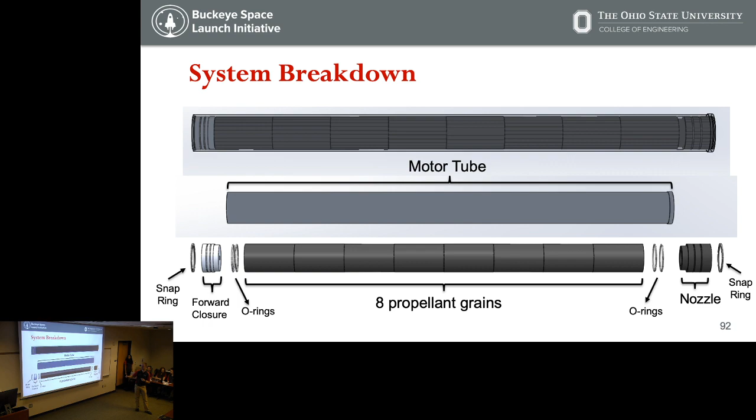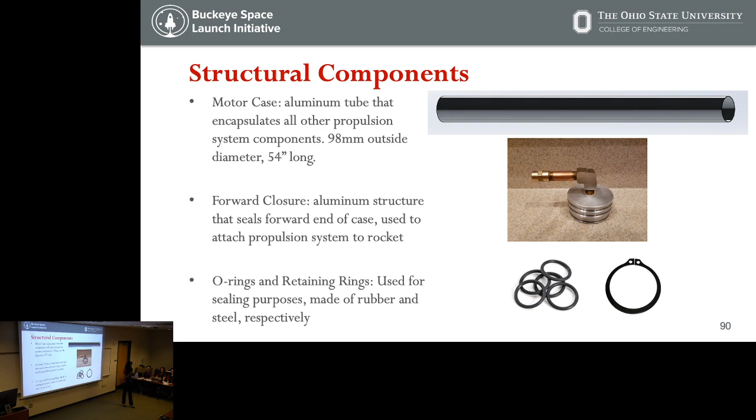Can you buy a better snap ring? We use pretty high grade steel snap rings. We have considered the possibility, and I believe we might do this - we're going to test it and make sure. Instead of a snap ring, we'll go to a spiral ring. I don't know the details on how those work exactly, but they will provide a little more distribution because the snap ring doesn't go all the way around, it has a little bit of gap, so we're hoping that can also help distribute the loads. Did that answer your question at least a little bit?